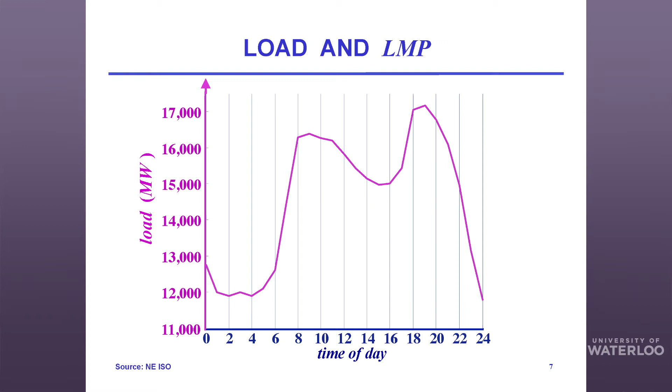So here you can see this time-varying nature of load. We have a very nice average for the whole day, but that average value is only achieved at two points during the day, and it's momentary for all intents and purposes.

Now let's also look at the prices that we have. These are the prices, shown with respect to the right-hand side scale, in green. Green can have two meanings in my slides: it can either mean money or green electricity type of stuff.

You can see that the prices pretty much track the load. The prices vary as the load varies, because we have to have different sets of resources to meet those loads. Again, we can get a nice average value for the prices, which will occur here around the two peaks, possibly four times during the daily period.

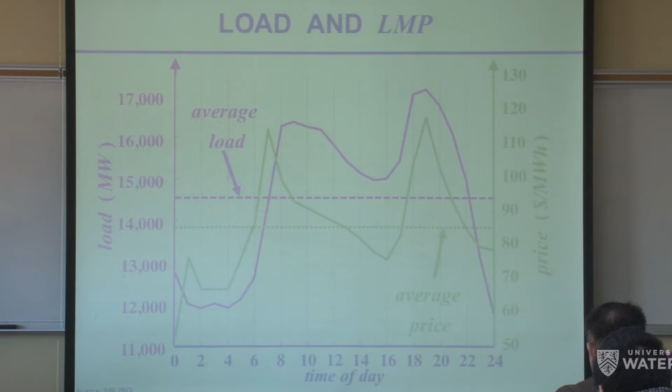Right now, the way we use the battery vehicle, be it a hybrid electric vehicle or whatever, it's essentially a load to the system. In terms of the daily cycle, we charge it during the night. The charging cycle is represented by the pink or lavender color here.

We start out in the morning, take the car out after it's charged, drive with it, and park it, probably for the duration of the day. When we're done with work, we drive it home, put it into the receptacle, and it charges overnight so we can repeat the cycle the next day. So this is purely its role as a load.

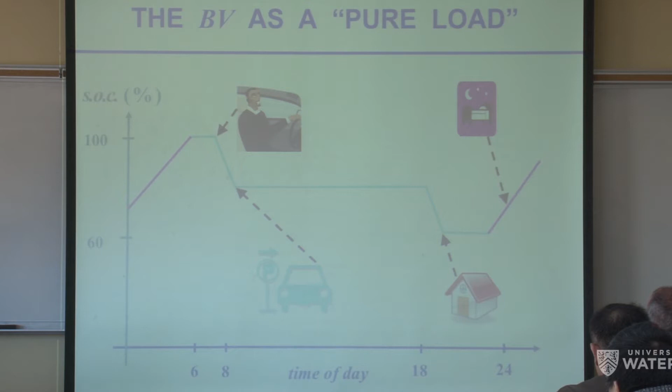So people immediately started asking: what happens when we get to 6 o'clock at night and all the guys in Brampton, Ontario come home and plug in their car? Is that going to blow one of the substations out? Is that going to mean we have problems serving the load?

Trends in North America start in California, so a study was done by the Electric Power Research Institute for the California load. This is the daily load curve in California when we don't have any battery vehicles.

We kind of missed a very important thing with electric cars—they're still not being bought in enough numbers to get worried about this. I always say if Steve Jobs were still alive, electric vehicles would have a tremendous rebirth, because he would come out with the iCar and everybody would buy it. But we missed that opportunity.

So they did the study to put in 4 million plug-in hybrid electric vehicles, and tried to see what the impact would be if those were used in California. California is a large state in terms of population, has a big load, though they've learned very well how to conserve.

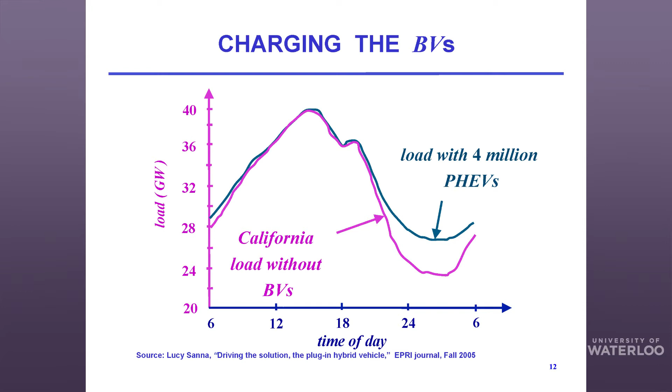Basically the biggest impact is at night. At night, in any of the power systems in North America, we have a big problem: we don't have enough load to support all the generators that want to stay online so that next day they can also serve load. So in places like Ontario, you'll have prices like minus $60 during the night—in other words, the generators are paying the loads to get online so they don't have to shut down their system.

In California, this would help because it would solve the low-load problem during the night when we just don't have enough load. So the answer came back that, not at the level of the distribution system transformers or substations, but system-wide, it would not be a very big problem.

So we would like to basically look at—

I think this university has an unstable electrical system, okay? That I can't help you with. That I didn't come to help you with. But this, I've never seen before.

I'd like to talk about how to effectively utilize the load, what we call leveling the load. We don't like to have too many kinks or too much variability in the loads because we have to do a lot of frequency adjustments. We always want to have, in a power system, way before the economists even started talking about supply-demand balance, we need to always have supply-demand balance between the load and the supply.

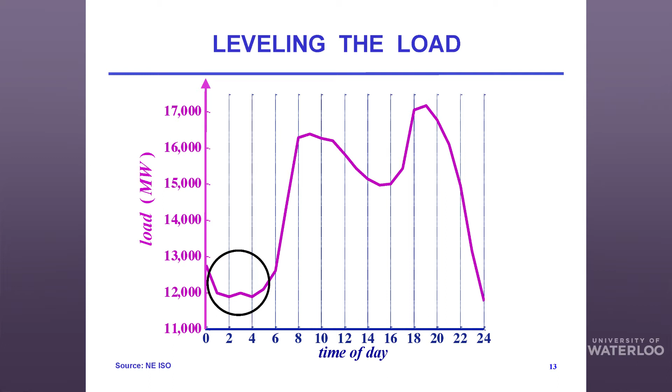So here we have a load as it exists in this New England system. I want to kind of focus on that region, which I drew over there as a circle, and look at it.

What I'd like to do is use the electric vehicles in a controlled way so that I can levelize that load. Much easier for the operator. He doesn't have to stay up at night and worry about what's going to happen, if he's going to have enough resources, because he can levelize the load.

So it will be much more like the Maytag repairman. He can think about his trip to Paris for next year.

So the controlled impact of charging the EVs is to try to charge all those battery vehicles during those valley periods so that we can levelize the load, and then for most of the night period, we could have a flat load. So certainly that would be a very nice way to do it.

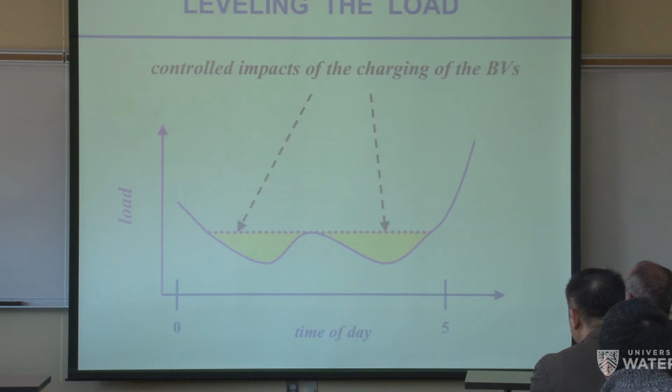Otherwise, we have to worry about the frequency issues. If we have too much generation, not enough load, then typically the frequency goes above the 60 hertz that we get. Your computers don't like it. The clocks, this kind of clock, starts running fast. So maybe the clock is not correct because you did not have enough generation at one point, and then it's slower and it slows down.

So let me show you, because of that, what we need in the power system: we need regulation service. Here are signals that one of the operators sends out. The largest one in North America is PJM.

The operator sends out signals basically asking generators to either raise their load, so it's above zero, please produce a little bit more generation than you did before, or to lower the load, cut back in terms of production because we have overgeneration.

And what's very interesting is just as the signal varies with time, so does the price. The prices here are a little bit different because we are delivering basically just standby service that we can reduce the load, so it's dollars per megawatt per hour, while previously I gave you dollars per megawatt hour. So I'm not selling the same service here. This is a regulation service where I'm trying to make sure that the supply and the demand are exactly in equilibrium.

You can see that much of the day, with the green scale, much of the day we have basically flat prices, but at night we have some very big prices because nobody wants to reduce their load. So we have very large prices during the night because we need big reductions of the load because there's too much generation online.

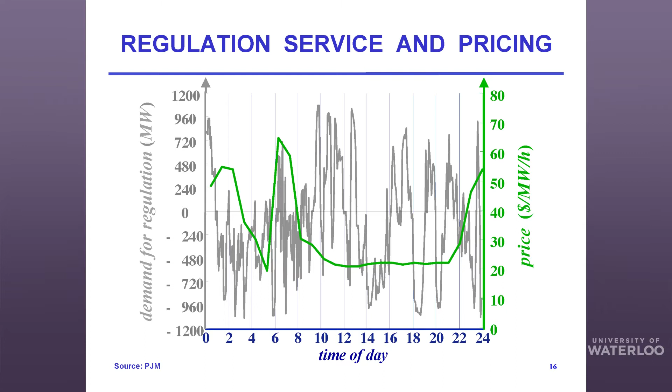Okay, so we have a nice average price, but that exists only at very few instances during the entire day in terms of the regulation price.

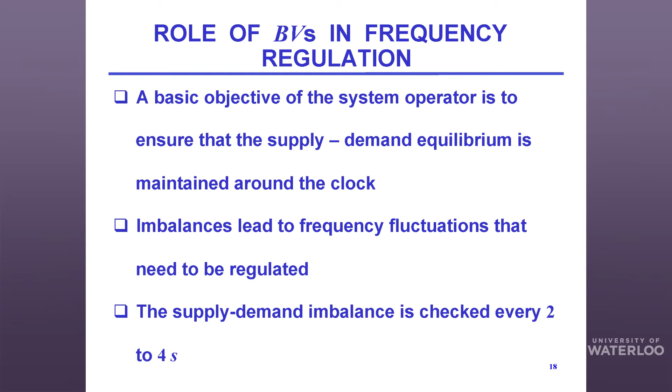So I want to look and explore the role that battery vehicles can play in terms of frequency regulation service provision. This is what we call frequency regulation. It's done via a grid control mechanism, which is called AGC, automatic generation control, but very, very important because every North American utility uses that.

It's not universal throughout the world. They don't have it in England, for example. They don't have it in every country in South America, but in North America we use it. So I talked about supply-demand balance, and this is exactly what we have to do.

We have to provide frequency regulation 24/7, second by second. It's a continuing mechanism the power system operator must provide. Anytime we have imbalances in the system, that leads to frequency deviation. In North America we have 60 hertz, 60 cycles per second, while South America is mostly 50 hertz. These frequencies either lag or lead, becoming too high or too low. We operate within very strict limits in North America, probably within thousands or even hundreds of a hertz cycle per second in many places.

So the supply-demand imbalance is checked automatically every 2 to 4 seconds. That depends on the region we're talking about in terms of timing.

Here we have the daily load that we talked about, and I want to see what happens in that region I'm focusing on. I'm plotting generation with one color and load with lavender. Sometimes generation is above load, so I have too much generation, meaning signals go out from the operator saying please reduce your load in the next 2 to 4 seconds. Sometimes it's below the load, meaning please increase your generation in the next 2 to 4 seconds.

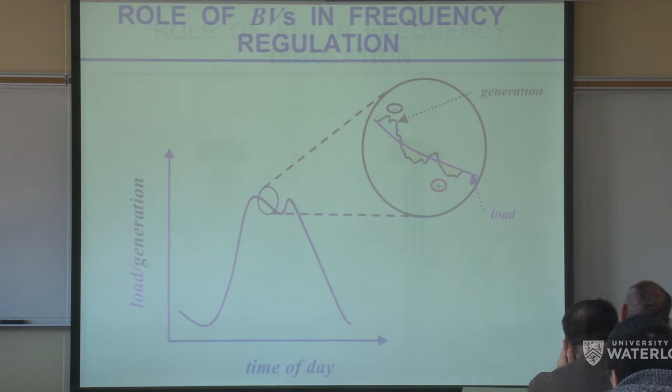The idea is can we use this kind of structure to take advantage of battery vehicles? You look at battery vehicles and then look at the imbalances which may occur between load and supply. Supply is shown in blue in this curve, and load is shown in green - demand and load we'll treat as the same. I'm stealing this pictorial representation from another publication, and whoever made my slide was too lazy to recolor it, so I'm using different colors to make sure the audience is still with me after 20 minutes of talking.

We could use those battery vehicles to supply service in certain situations. When demand - the green - is above supply - the blue - we have too much demand, so we have to raise generation, meaning you discharge some of the batteries. In the other instance, when supply is above demand, we charge those batteries because that essentially increases the demand on the system, increasing the load. So there's a symbiotic effect where these vehicles could come in and be of use.

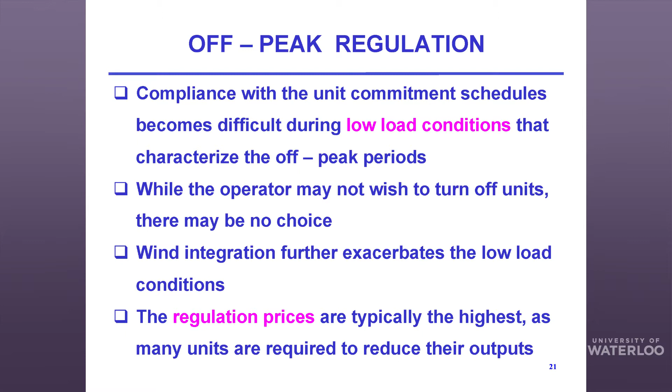At night, what we call off-peak regulation is a very critical problem. That's what we want to take advantage of, because at night we want to charge the vehicles since electricity is much cheaper, and people go to sleep - they don't necessarily need their cars. In this entire presentation I'm assuming the car is used primarily for commuting purposes.

That's the basis of the studies I'm doing. I have to comply with the unit commitment schedules - every day the operator decides which units will supply demand the next day, so those are the schedules. But it can happen that because we have too little load and too much generation running online, we may have to shut off some units. The operator doesn't like to shut down units, but sometimes has no choice, because keeping them on would cause too high a frequency in the system, which we cannot operate with - so there's a self-protection mechanism that would just disconnect those generators.

As we bring in more wind, that situation gets worse, particularly in the Ontario area and the Midwest where I live, because wind likes to blow at night, not during the day when we really need it - when we could use that green generation. So this low load condition is exacerbated by the deepening penetration of wind.

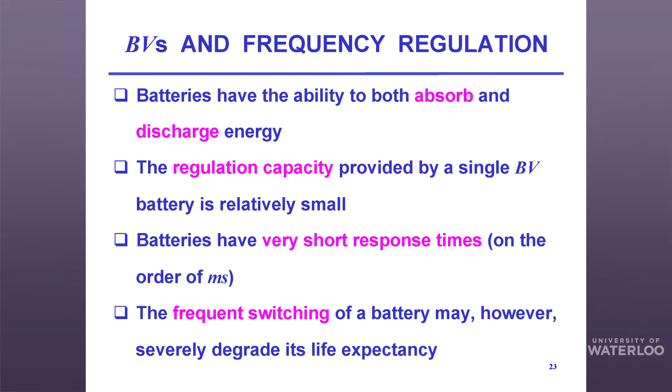So let's talk about battery vehicles and frequency regulation. We know batteries are good because they can both absorb and discharge energy. So there's both a source and a sink, not at the same time, either one or the other. If you do it at the same time, you don't do anything because you cancel each other out. Then the regulation capacity provided by any single BV battery is going to be very small, not in any way palpable to the system. The system will see that as noise, okay?

So batteries have a very good response time. In other words, you tell them charge, they charge. You tell them discharge, they discharge. So there's no latency in the system. They respond very, very quickly once they get the signal.

We also know that it doesn't do very much good for any single battery to be switched on and off, charged and discharged. So we have to do this in a very judicious way in terms of how we use them.

So I want to look now at the complement of what we were looking at before, in terms of the daily cycle of using the battery vehicles, but as a supply side resource during the time it's parked, say at the office, in a garage, while the person is just working and the car is basically idle. We could be using it for the purpose of doing some regulation services, or even better, of supplying backup.

Every time you do operations, you always have to have a spare tire. The spare tire in power systems is called reserves. So we always dedicate a certain amount of capacity which is already energized and synchronized with the system, but we cannot devote it for any other purpose because we're holding it back just in case the regular tire goes, then I have to make use of the spare tire.

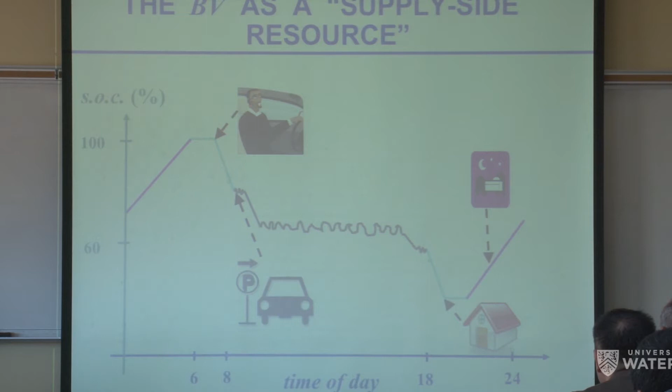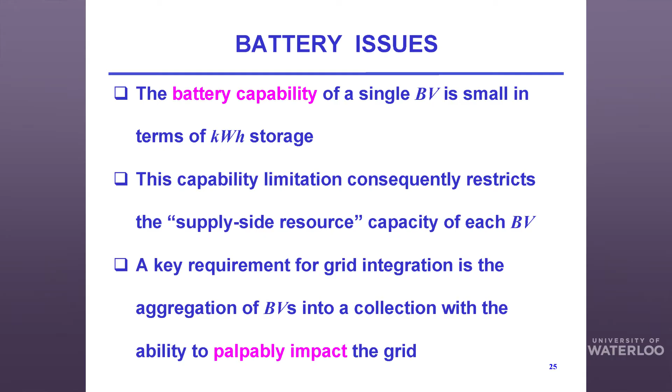So that's the way I want to look at this. We want to look first of all at capability. So I make a distinction here: I use the word capability when I talk about the amount of energy I store. Capacity is the rate at which I charge or discharge it. So I distinguish between those two. That's why I'm using the word capability.

But for any single battery that's small, particularly from a system point of view, because the system is at the bulk level, on the order of hundreds and hundreds of megawatts and thousands and thousands of megawatt hours. So because of this limitation in size, the supply side resource is not very useful by itself for a single battery vehicle battery.

So in order to integrate these battery vehicles into the grid, what we have to do is get an aggregation of them. They don't necessarily have to be co-located at the same location, but there has to be one entity which interfaces with the grid to present what an aggregation of these battery vehicles can do. So I'm bringing in that we need to have an aggregator who can make this aggregation something that's palpable to the system, so the system doesn't think it only senses noise over there.

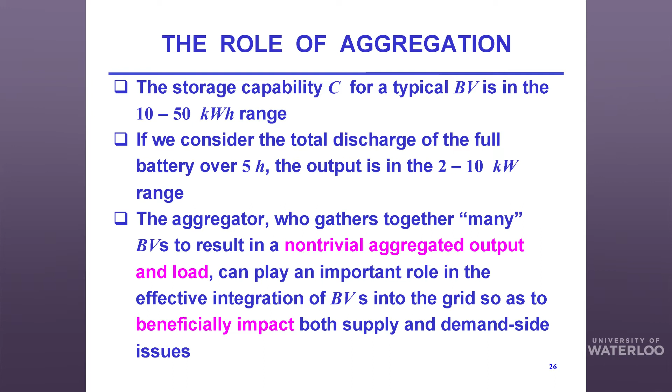So in terms of the aggregation, if I look at a single battery for a typical BV, it's in the range of 10 to 50 kilowatt hour range, so that's the capability. And we typically say we can charge it full or discharge it full, though you never necessarily want to do either, in terms of battery life, on the order of 5 hours.

So if we say we have a 10 to 50 kilowatt hour range for capability over 5 hours, that means they can operate at 2 to 10 kilowatts for each of those batteries.

So the aggregator idea comes purely from demand side management, where large buildings in Toronto were gathered together by an aggregator who said, I'm going to put these guys together as a single block, and the utility can deal with me if they want us to reduce the load by, say, 100 megawatts for 1 hour.

We can do that. We'll make the elevators run a little slower, reduce the lighting for a few minutes. It doesn't mean we do it over the entire hour, because my aggregation is large. Everybody's out for a few seconds, then the next group comes in, and the next. So at any one time, only a small percentage of the total aggregation has a lowering of energy, but over the whole hour I'll be able to cut 100 megawatts, saving 100 megawatt hours of electricity during that hour.

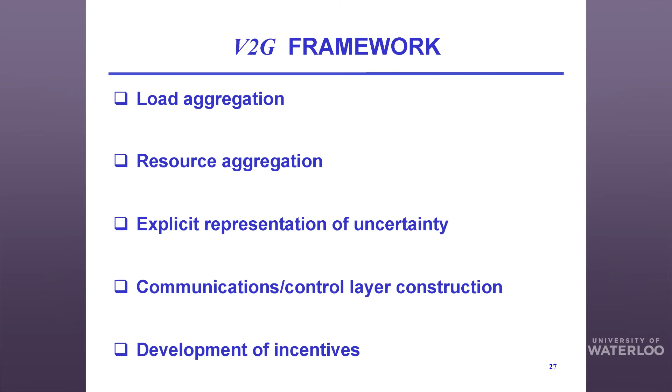And then you're going to say, well, what about the guy who says he's there, but at 2 o'clock he's got a dentist appointment? So I want to bring in explicitly the representation of uncertainty, that some guys may not be there even though they're working for 8 hours, because appointments take their car out. How does that impact things?

So I'm going to discuss that topic, and then talk about what we do in terms of an information, communications, control layer, what the basic requirements are, and how an aggregator goes about building this aggregation. He has to have some carrots, not only sticks. What kind of commands is he going to give to tell potential members, come and join my aggregation because it's going to be better for you? That's what I want to discuss.

So let's lay out the principal roles played in this framework. We have to have the aggregator, a new player who does not exist today. It doesn't mean the local distribution company couldn't be that player, but it's somebody who will have to discharge this function that today doesn't exist.

We'll talk about the aggregated BVs—that's basically the Greek chorus being directed by the aggregator. We'll talk about the independent system operators, sometimes called in the US the regional transmission organization, basically the entity that operates the bulk power system.

Then we have the energy services provider, the one who interfaces directly with the electrical customer, and then we have the local distribution company. In some places the ESP doesn't exist, so it could be the same as the local distribution company. In other places, an ESP provides that service.

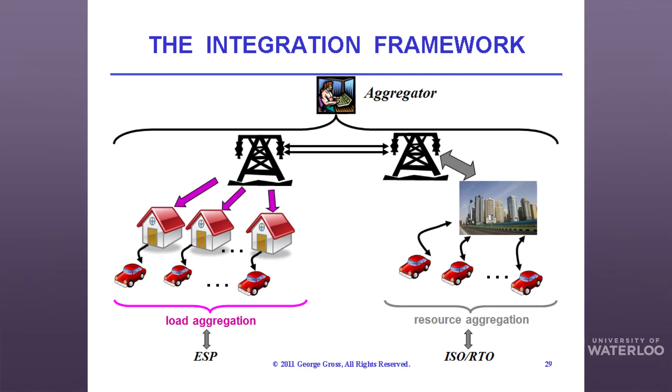So for the integration framework, I need the aggregator to play the role of taking all the battery vehicles and aggregating them as a single load when they buy electricity, meaning he could go out and buy bulk electricity for those guys and try to resell it to the loads, but at a cheaper price.

So I'm already painting the picture of the future, where I believe none of the regulators will allow battery vehicles to be served electricity at the same price as you buy electricity to run your refrigerator, washing machine, or dryer, because it's going to be seen as a source of taxes.

For example, if we have an electric vehicle, it's not going to buy gasoline, but somebody will still have to maintain those roads, because your potholes in Ontario are fantastic—you guys could get first prize for the North American continent, as far as I'm concerned.

Unbelievable. Chicago was competing with you. I think it's losing. Okay?

The aggregator also has to come and provide a service for the resources when we want to run these guys to maybe provide frequency regulation, so he's going to aggregate them. It doesn't mean all these cars have to be in one parking lot, but he'll have to be connected via some kind of communication network so he can offer that service to the grid. As an example, a place like the parking lots around Pearson Airport is a good candidate to start with, because you have enough space to put together some sizable aggregations and bring them on.

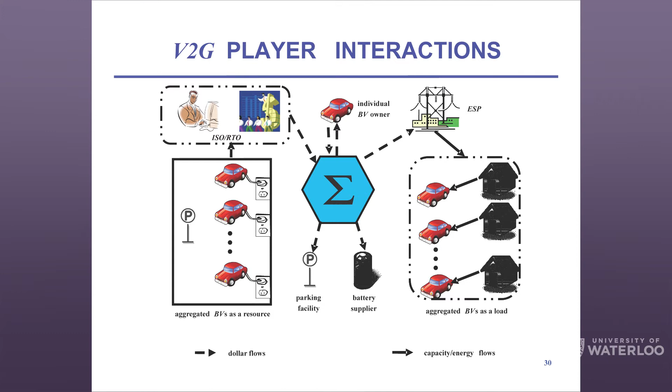So we have two aggregations: the load on one side, and the aggregation of resources on the other. Here I have two types of flows: flows of dollars, and physical flows of electricity. The solid line is the electricity flow, which can be in terms of capacity or energy, and the broken lines are the dollar flows, so we can differentiate between them.

All the flows here are shown, but we're also adding the signals, because the system operator has to be able to send signals: raise generation, lower generation, give me some energy, and so forth. Those are shown in dotted lines. Is this directly with the system operator or some local LDC? No, at the level of today's operations, the vehicles would be providing services to the power grid, not to the distribution company. When I come next time I'll talk about microgrids and put on that hat. But this is at the level of the system operator, the IESO in Toronto, making sure that at the bulk level we do that.

The charging of the vehicle will be done at the distribution level, so you also have to account for talking to the distribution company, because you're going to use those wires to charge them. I put the aggregator at the center, because he gets all the signals and distributes them to the vehicles, whether parked at home or elsewhere. At home, we can levelize the load at the direction of the local distribution company, because he wants to levelize load. But during the day, when they're parked at offices, it would be done to make sure they can also be used for frequency regulation.

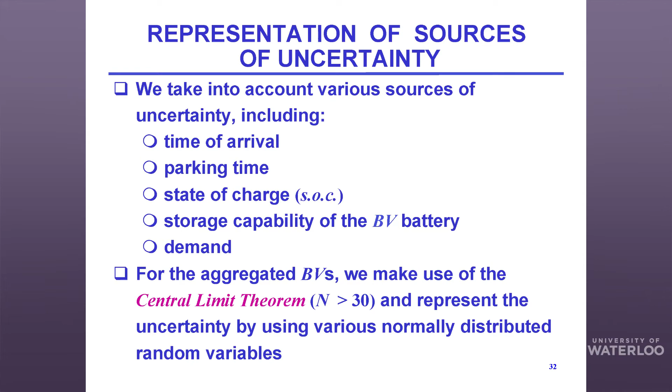I want to talk a little about uncertainty, because that's always important, since there will always be exceptions to the rule. What kind of uncertainty are we talking about? Well, people don't exactly behave the same way in North America. They get up when they want to get up, arrive at the office when they want, and the number of hours they park is going to change. A key variable for batteries is the state of charge, which is essentially the metric we use to know where the battery stands: can it provide energy, or does it need more energy because it's too discharged? And then we have to know about each car.

We're going to have a multiplicity of car manufacturers, so the storage capability may not be the same. Now, this won't happen if it's up to Elon Musk, who runs Tesla, because he wants to be in the battery business. So he's building this giant $5 billion battery factory.

Which he wants to use to reduce the price of Tesla to $35,000. He can be very successful because he got $5 billion from Panasonic, and he got $1.25 billion from the Nevada government in terms of tax benefits and incentives. So he can do it because he's using other people's money. But if he's successful, I think that's going to get this thing going, because he's going to reduce the price of batteries, and then he's going to leave Tesla, and he's going to start competing against the utilities because he can do batteries very cheaply.

So that's coming, the saga will continue. Now because we're talking about large aggregations of vehicles, we want to use results from statistics. So we'll use the central limit theorem, the law of large numbers. Essentially, we're looking at independent, identically distributed random variables, and everything behaves like a Gaussian distribution. So we're going to use that because we're going to talk about large aggregations.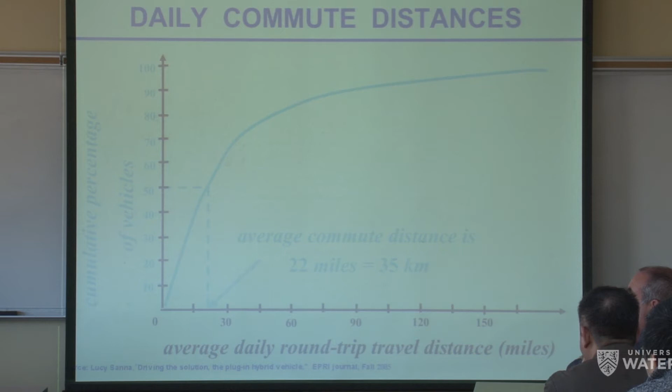So that means it's good in terms of looking at the car. The car, you would probably have it parked, if you don't use it to run errands and so forth, on average 22 hours a day. Let's assume it's 1 hour to commute in one direction, 1 hour in the other direction.

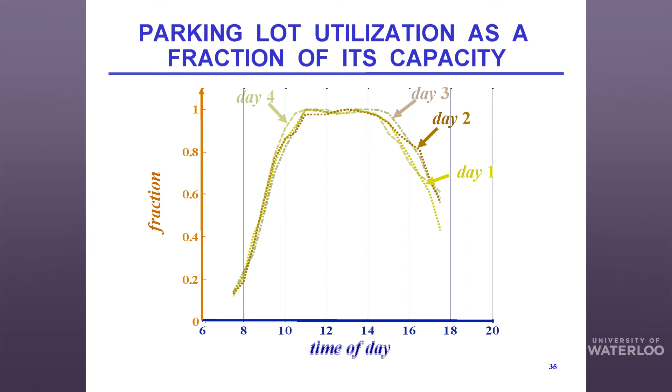So let's look at this law of large numbers, and I'm looking here at a parking lot. This is data taken from Livermore, and day 1, you can see the pattern over there. Day 2 is slightly different. Day 3 is again slightly different. And let me pass an approximation with the normal distribution. So it really captures all the characteristics.

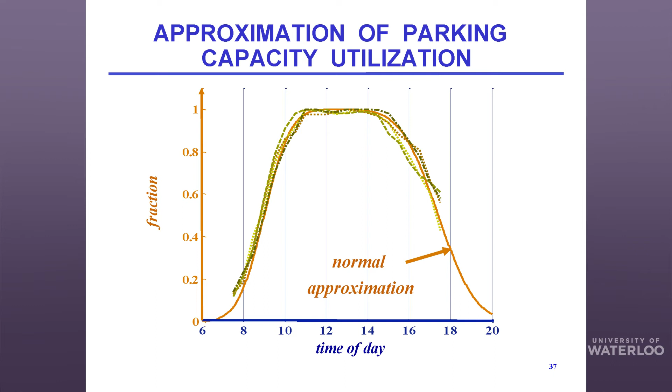Of course, I'm going to have to basically abridge it somehow, just like Reader's Digest is abridged in some way, but cut it off because I'm not going to have negative values going in there. But it's a pretty good approximation when we do this normal stuff. So this is the basis that we did our work in terms of bringing in uncertainties, that we have so many independent vehicles. They don't have to have the same charge and so forth, but we can get a nice bell-shaped curve in terms of their distribution.

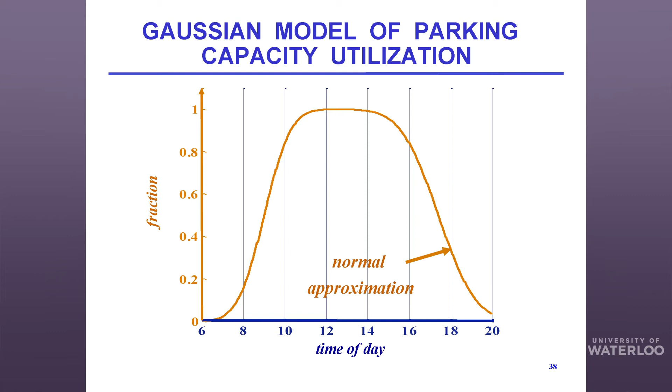So I didn't talk much about the state of charge of the battery, so I should spend a little time. It's a very important metric. It tells me basically what I can use that battery for. So we do a very simple classification. If the state of charge is below 60%, then we don't want to discharge that battery anymore, we would just like to charge it.

So below 60%, the battery vehicle will act as a demand-side resource. If it is above 80%, then we can discharge it because we have a lot of charge over there, so it can be a supply-side resource. And then between 60 and 80, you can have it as either or, but please not both, because then they cancel each other. So it's either or.

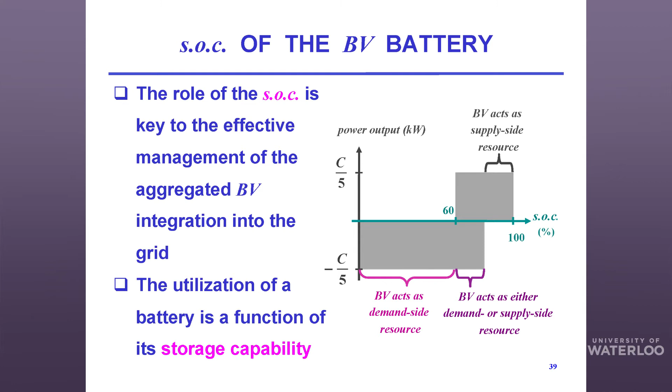Okay, so the utilization of a battery is very much a function of how much I can store in that battery. Whether I can put 10 kilowatt hours or 50 kilowatt hours, I'm going to have different types of resources and impacts. So when I take all the aggregated battery vehicles, they can bring together essentially an aggregation, something that can impact the system.

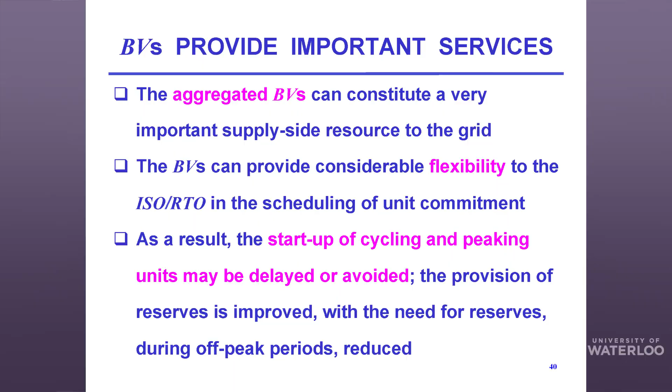So they have the potential to constitute a very important supply side resource to the grid, not only demand, but also supply. Because of the fast response, they can help the regulator be very flexible, because with all the time-varying impacts of having renewable resources, we can have the problem with intermittency.

Basically, we have a cloud going over the solar panel, and all of a sudden its output goes to zero. The load doesn't change in the rest of the system. The power system operator has to be able to cover that, so he's got fast responding devices. He can get that from the batteries, which are aggregated.

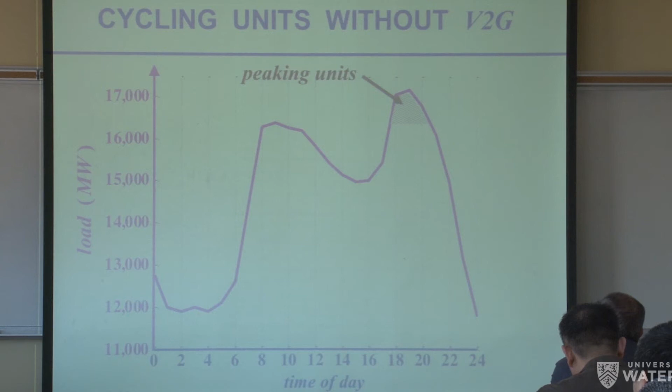As a result of the fact that we can use these batteries as essentially backup type stuff, I'm going to change the way I commit the units. In my system, I'm looking at those two peaks. I'm going to use peaking units to meet the very, very high load of the day, and I'm going to use some cycling units to meet the other loads just below it. They call them cycling because they're up sometime and down sometime, so they cycle between being all the way at full power or at a lower output.

In order to be able to do that, I have to have both the peaking unit and the cycling unit started a number of hours before, because I have to start up those cycling units. The peaking units are very fast responding, meaning I can get some of the gas turbines to be online and at full output in 5 minutes, but the cycling units take longer. So I would start those cycling units sometimes at 6 o'clock in the morning to be able to provide output for the first peak and then also for the second peak.

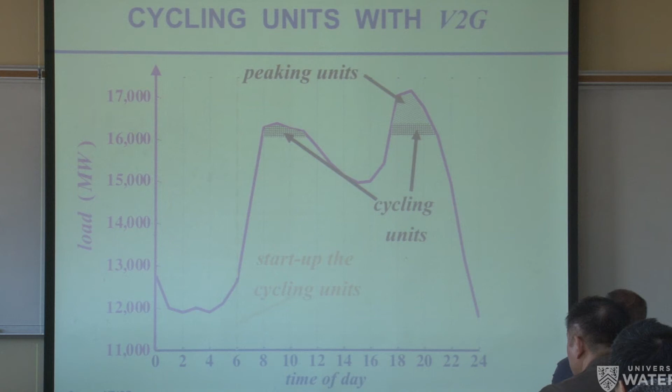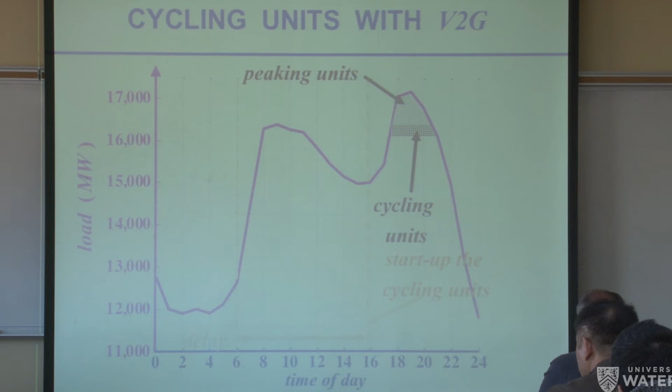Now, if I bring in the V2G, what I can do is use that peak to be served by the V2G, and I can start up those cycling units at a much later time. That flexibility means they operate fewer hours, they pollute fewer hours, so in effect we can get slightly cleaner energy. That would be a very, very beneficial impact that we can get.

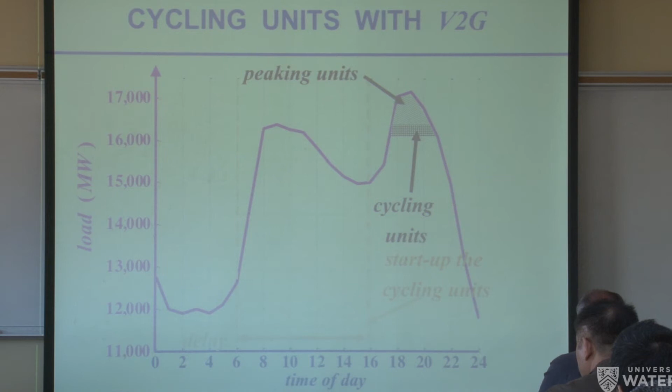So this is the additional flexibility that those battery vehicles can provide to the system operator. By having that delay in terms of the startup, that means I pollute less during that entire period.

So I wanted to give you some examples of simulations that we did. We wanted to look at the regulation service. This is the signal from PJM that we're using. And then this signal has to be translated into the signals that the system operator would use and send to an aggregation of vehicles.

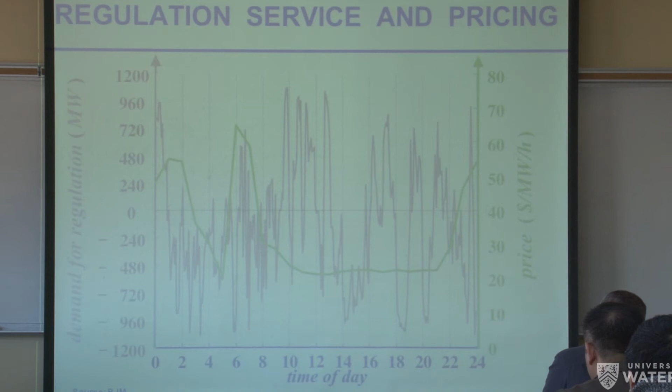So I'm putting here together, for simulation purposes—don't ask me how did I convince 100,000 battery electric vehicles, we don't have that many. In terms of plug-in hybrids, in the last 4 years, we sold something like 130,000 of them in California. So the rush is not on yet to buy these vehicles.

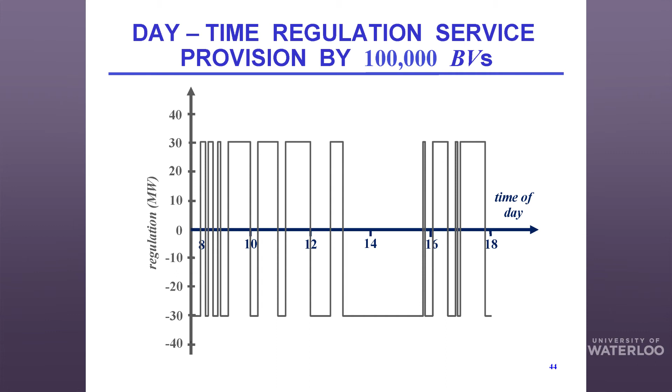But essentially, this would be the raise-lower signals that I would send to provide frequency regulation. On the positive side, we're asking those electric vehicles to produce more output. On the negative side, they're being used for charging. And from these 100,000 vehicles, this is plus or minus 30 megawatts of service provided.

I'm looking here at the percentage of EVs that provide this 30 megawatts between 8 o'clock in the morning and 6 o'clock at night. At no point do I have more than 8% of those vehicles involved. So I'm providing 30 megawatts of service, but with less than 8% of the vehicles at any one point in time. I do it in round-robin fashion, basically—this guy's for 6 minutes, this guy's for 6 minutes, and so forth.

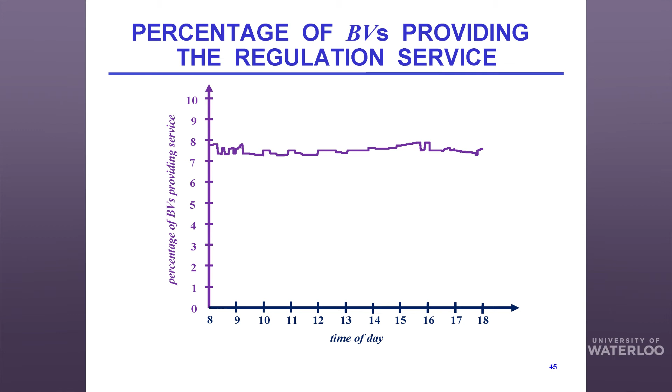So I don't impact any of the vehicles over a long period of time. I can do this service of 30 megawatts plus or minus with somewhere between 7 and 8%, but certainly less than 8%, of the vehicles. The key message there is that to provide this regulation service, I don't use all the vehicles all the time, but I just use a small percentage of it.

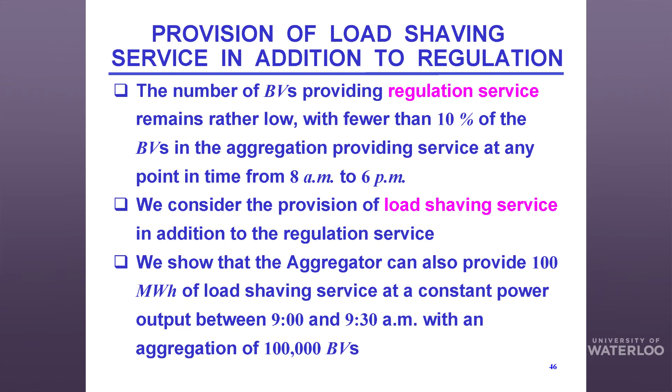So now we'll ratchet up the problem a little bit by saying, not only provide me regulation service, but can you also give me load shaving service? Basically, provide some of the energy. Specifically, I want you to provide from those 100,000 vehicles 100 megawatt hours of load shaving service between the period of 9 a.m. and 9:30 a.m.

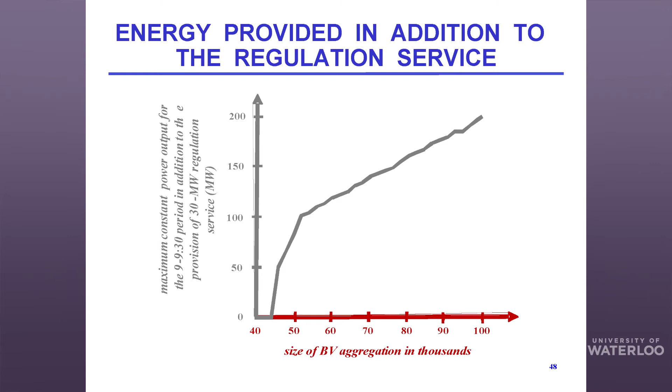How are you modeling the regulation service? In what? So this is just the demand. No, but what is the overall framework of your problem? Like, is it what kind of model are you using? I'm just looking at the capability of so many thousand vehicles, what service they can provide, what is the maximum output they can provide for this period.

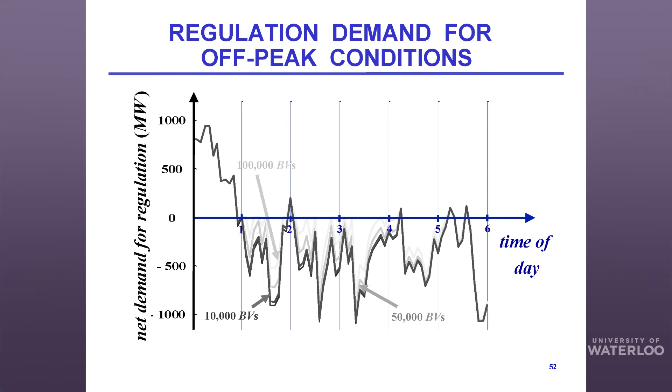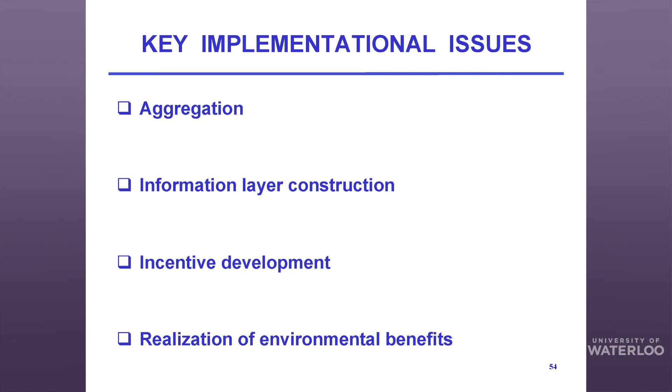So let me get to some of the key implementation issues, because I don't want to keep you guys too long. The aggregation issue, how do you go out and form these aggregations? Then the construction of the information communication control layer and the development of incentives.

And another one, because this is very important in terms of selling the idea, is the fact that this aggregator would be the only one who could provide reliable information on the realization of environmental benefits. As a single vehicle, a battery vehicle does something, but nobody can monitor it at the level of the bulk power system. However, the aggregator can, when he has 100,000 vehicles. He can monitor that and he can provide those results.

So in terms of the communication and metering infrastructure that's needed, very important too, and it's very important that it be secure, because if it is connected to the grid, it's another portal that we have through each of these battery vehicles to try to hack the grid. And it's not something out of science fiction, it's something that happens.

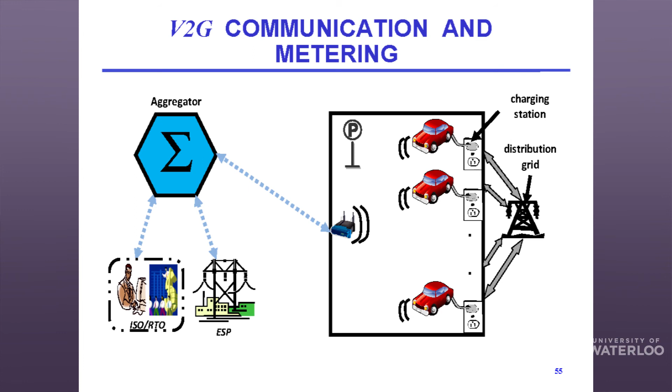Go ahead. Yes, do you consider the impact on the battery lifetime of this kind of regulation? So yeah, of course we have to do that, and that's another problem over there. But that's a problem independent of whether the vehicles are used for V2G or not, because one of the things I'm going to propose is that the aggregator can get into the business of being in the battery management business. He buys these batteries in bulk. He sells them to the individual customers. He's going to say, you don't own the battery, I own the battery, so I'm going to do the best I can because I want to make sure that I get as much life out of those batteries as possible. So that's the mindset over here.

But basically, we need communication to be able to talk to each of the vehicles. We need communications to talk to the system operator, and we need communications to talk to, whether it's a distribution company or the electricity service provider.

We need that network most likely implemented today in a wireless sense, or perhaps on the basis of the internet. But it's not going to be fiber-based, because the vehicles have to travel big distances, and I have to be able to communicate with each vehicle.

So the first thing we're thinking of is to put essentially something like a SIM card on each of the vehicles, so that I can get the identity of the battery, not so much the vehicle, so that I can charge that battery the fees associated with the services I provide, or pay that battery if it provides services to the grid.

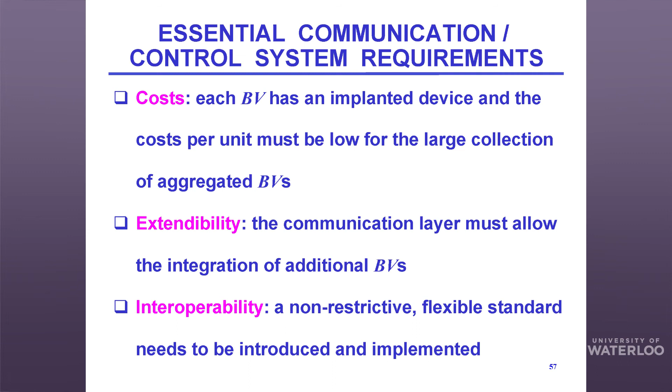And then we have to have not only modularity but also extendibility, because as we get more and more vehicles into the aggregation, we have to be able to integrate them into that network. Clearly we will need interoperability if we want this to be part of the grid, so all of those requirements are met.

But just very quickly, information layer flows — there's not that much information, and I'm only going to be interested in collecting information if there is a change from the previous value. If there isn't, I don't have to collect it or transmit that data. So I have that kind of checking to make sure I'm not wasting any resources.

The roles of the aggregator — I put down here all the roles I see the aggregator providing in terms of developing the parking infrastructure and the incentives associated with it.

So he has to undercut, like the parking — your university probably makes more money from parking fees than from tuition, from what I can tell, because they basically charge rates like downtown Chicago, at least for visitors. I'm still a Canadian citizen, so they should have given me a good deal, but they didn't.

So they have to do the battery maintenance, and they have to create relationships with all the manufacturers, because new cars are coming in, so they have to know the technology, be it of the car or of the battery. And then they interface with the system operator.

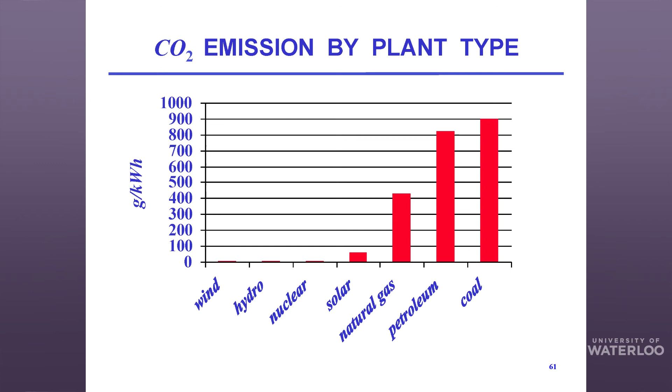So just a couple of slides looking at emissions of CO2 in grams per kilowatt hour. Clearly wind, hydro, nuclear are very low emission devices. Solar is a little higher because of certain assumptions we make, and then we have natural gas, compared to which both petroleum and coal are twice as bad in terms of emissions. That's why there's this rush to gas, because it's relatively clean.

In terms of energy consumption under mixed conditions, depending where that generation comes from — for different cars, I have the number of kilowatt hours per kilometer, and this has to be mixed conditions looking at the overall picture. So you can see, depending on the EV, typically the market that exists for them is in California.

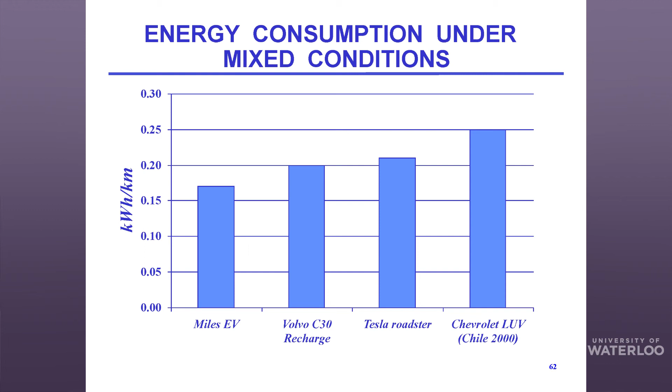So this is California conditions, and California operates as a state because they like to export pollution. They'd rather pay higher prices, but they want that pollution to be in other states like Arizona or Wyoming, and just import the electricity.

And for different cars, we can see some figures over there. In terms of CO2 emissions, it certainly depends on where the electricity is produced. So an electric vehicle in France has very low emissions, because France happens to be 88% hydro and nuclear, and so they have not much thermal generation in comparison. Canada also has a lot of hydro, so electric vehicles are relatively low. The US is primarily still a coal state, but we're moving away from that and so forth.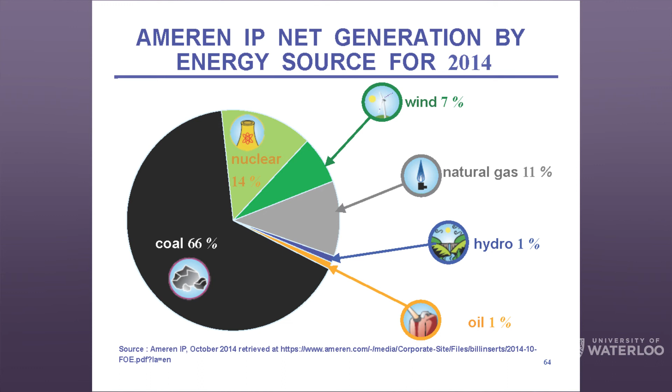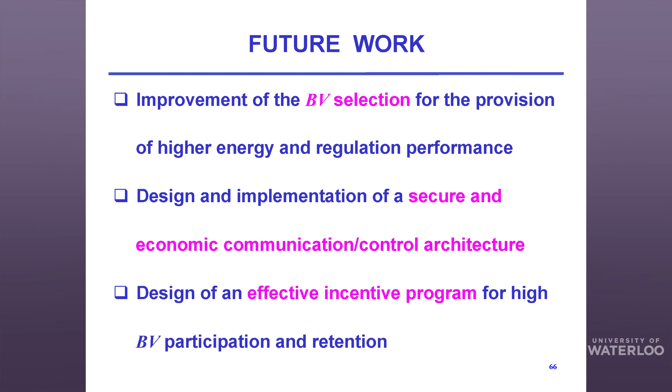So I'll conclude by saying that I presented the framework here in terms of integrating battery vehicles into the grid, both as loads and as resources. They can be very beneficial. The only thing that we need now is for somebody to go out and tell the people, please buy that car.

And we're going to start seeing those kind of advertisements coming in, because this is going to be an important market. So vehicle to grid, we're starting on something which can be very big, but we need the people to buy the cars. So I'm ready for questions.

The floor is open. How do your models and processes work between urban and rural environments? So we didn't go to that finer grid in terms of resolution. I'm sure we could model it, but one of the issues is going to be the distance, and if you're talking about relatively remote rural environments, then that's going to add to the distance, but that's going to mean a cleaner environment. The issue is, what is the electricity which is being charged into those vehicles? So it will depend, but we could do those kind of studies. It's a good question. It's important to start looking at this.